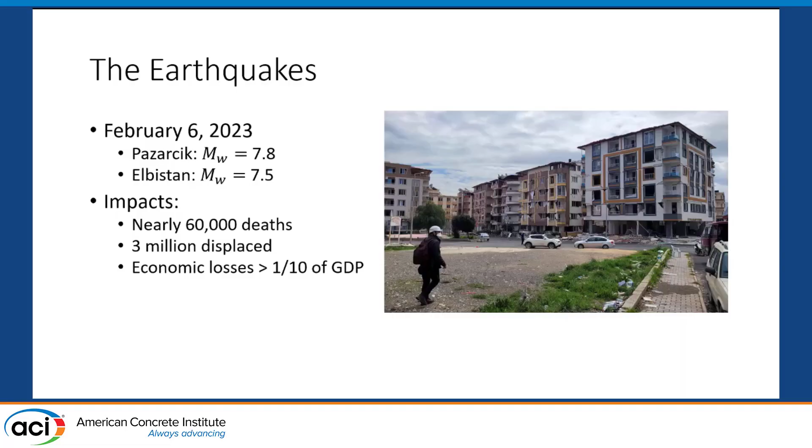The impacts were substantial. Considering both Turkey and Syria, there are estimated deaths on the order of 60,000, 3 million people displaced, and many of them are still displaced. On the Turkish side, economic losses exceeded 1/10 of GDP. So substantial impacts from this shaking. I've listed my sources there.

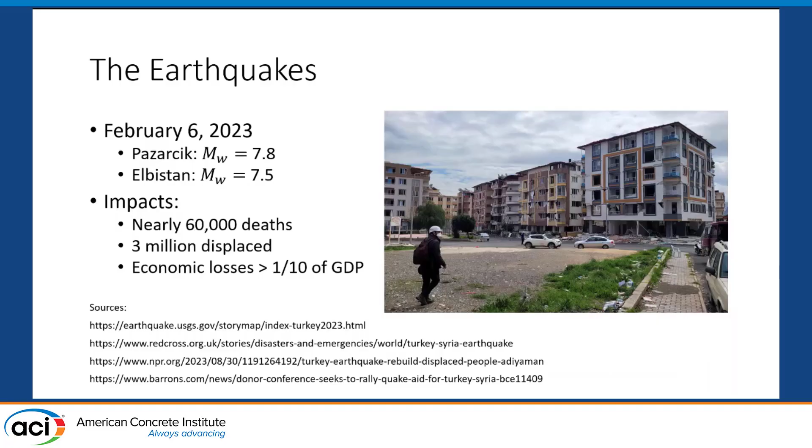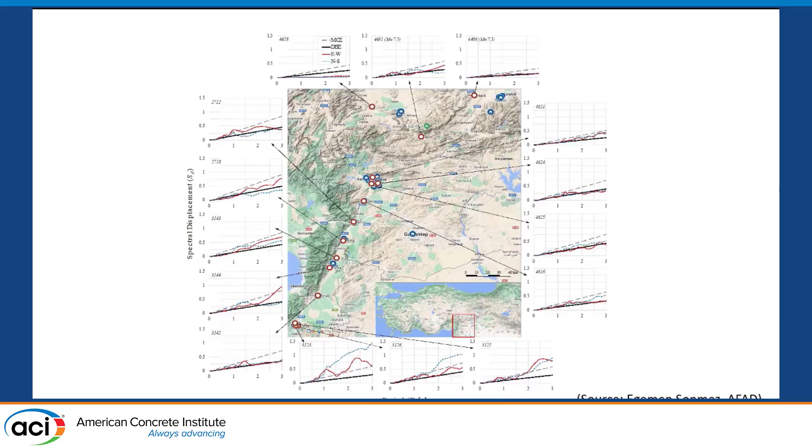ACI Committee 133, with financial and logistical support from ACI, put together a team. I want to acknowledge Santiago Pujol and Cemalettin Donmez for doing a lot of the organizing on our side too. We put together a group of dozens of engineers, practitioners, academics, and students from all over the world. A large contingent was local from Turkey. We had engineers from ASCE join us, from NIST, from Wiss, Janney, Elstner—quite a large contingent of folks mobilized.

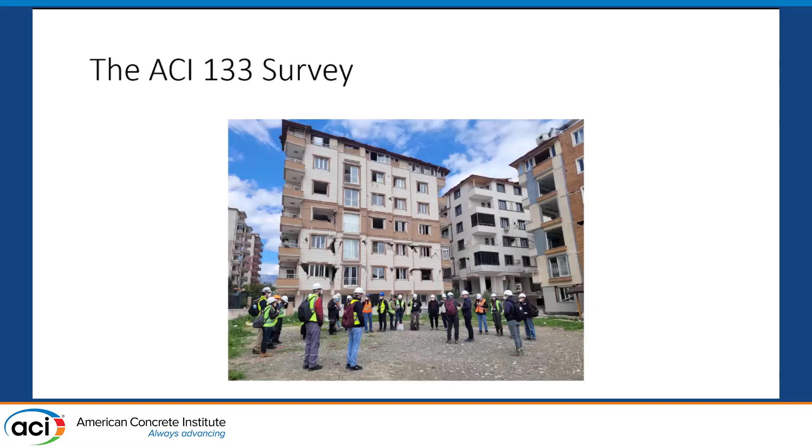We actually had two different groups. This is one of the groups preparing for a survey in Antakya.

Over the course of 2 weeks, in late March and early April, about 2 months after the earthquakes occurred, we spent time visiting 10 cities on the Turkish side and surveyed roughly 300 buildings. We have complete records for about 240 structures. The way this would work is we would get into buses, go to the city of our choice for the day, and spend the day, sometimes 2 days, in that particular city looking at structures.

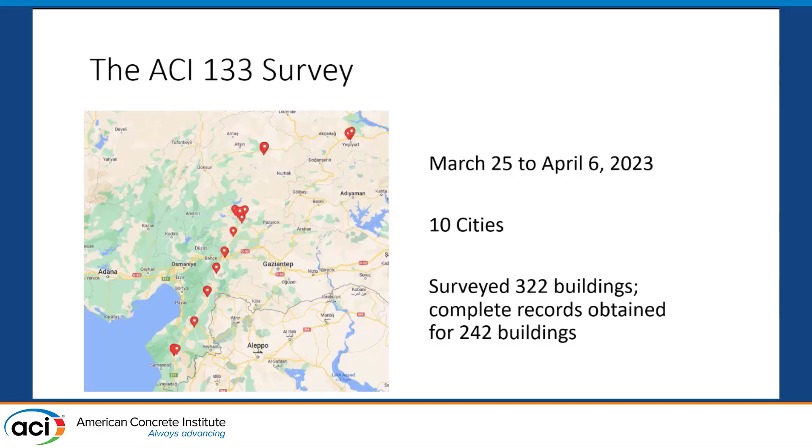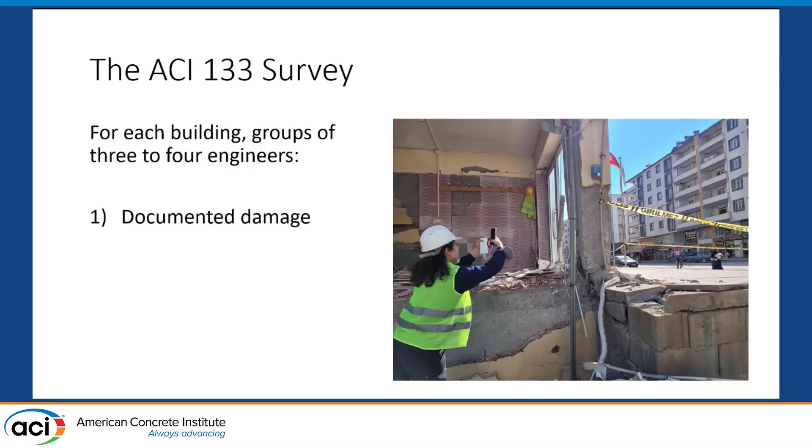For each of these buildings, we had a group of say 3, sometimes 4 engineers that would enter the structure and primarily focus on what we judged to be the most critical level. Often that's ground level, but in the case of podium structures, maybe we selected a different level. We spent most of our time documenting damage in all of the vertical elements, beams, etc., anything we could observe, and also took time to measure span lengths and column and wall dimensions throughout that critical level. I think some of my colleagues will present more using the data we collected here, but we have pretty detailed data for 240 or so buildings.

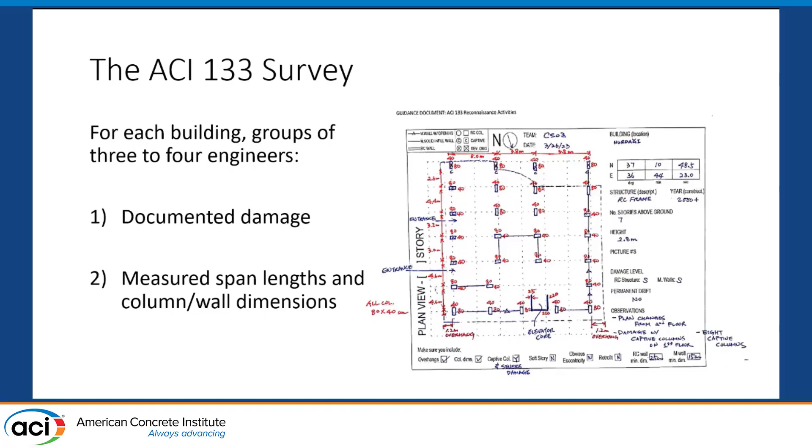The narrative that's come out from these earthquakes, the media has presented, has really focused on problematic detailing. And it's true, that's part of the story - the shaking and drift demands revealed problematic details. That's the focus of my talk, but I think there's more to the story, so I hope you'll stick around for the other two talks this morning.

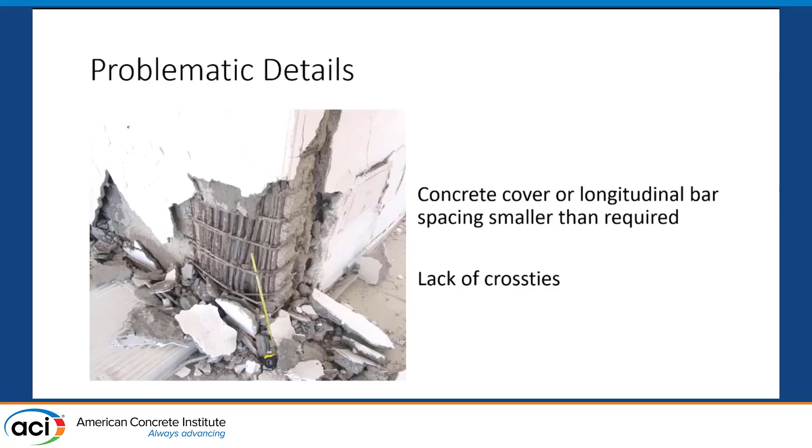Also, pretty pervasive lack of cross ties where I would have liked to see them. And I should note, these details are not compliant with the Turkish code requirements either - it's not necessarily a deficient code.

We saw a lack of 135-degree hooks in all kinds of elements, as in a column that did not perform well.

We saw widely spaced transverse reinforcement around small diameter longitudinal bars, which I think is an interesting note. The spacing here may be okay if the bars were number 8 or number 9, but these were roughly number 6 bars. I think they prefer to use these smaller bars to make it easier to bend and place in the field, but that, of course, makes buckling more critical.

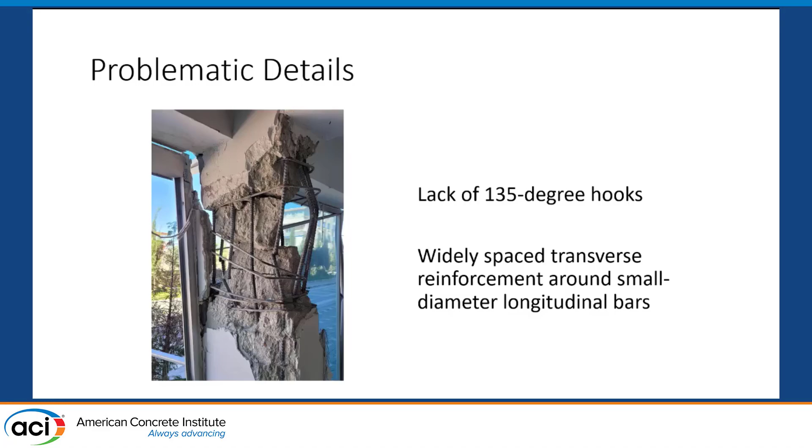We saw several examples, very common, of buckled bars right around the perimeter of the building at the top of the foundation. In this case, there was a column that appeared to have good confinement throughout the clear span and in the foundation, but at the joint between the foundation and the column, the space between the bottommost column hoop and the topmost foundation hoop was too wide - and of course, the bars buckled there.

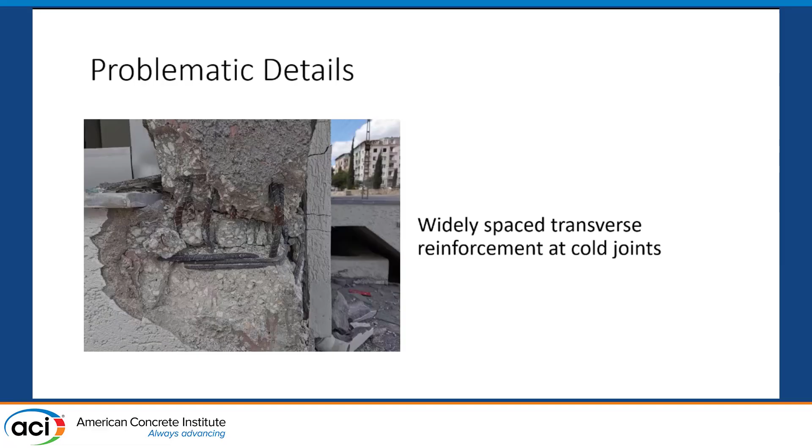You saw a lot of these. This is a zoomed-in photo of a column - I'm tracing what would have been the base outline of the column section where it met the foundation. You can see this bar coming out of the foundation that was bent into a dog leg to fit into where the hoops and column cage were, so it wasn't quite lined up properly. These dogleg details effectively function as a pre-buckled bar - as soon as you start to displace, they want to straighten and then bend. We saw several examples where this detail led to bar fractures.

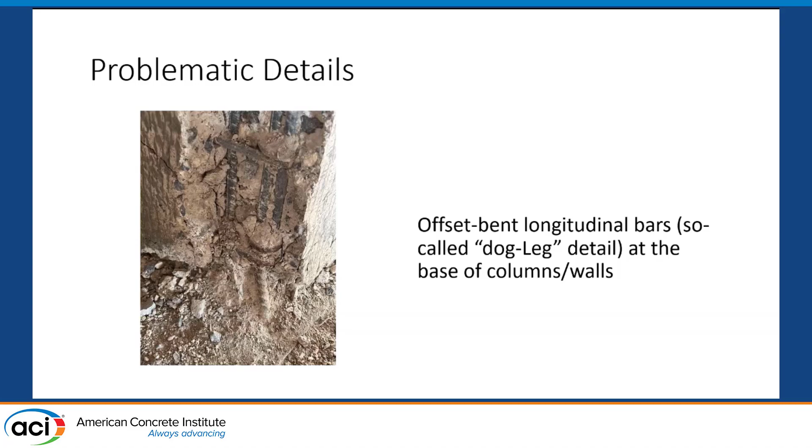We do have offset bent longitudinal bars in our code, but there's a requirement on angle. In many cases, these were much steeper than the permitted angle.

There were a lot of lap-spliced bars where it's convenient - at the base of columns and at the base of walls - and that caused all kinds of concentration of damage. This is a photo of a column with a lap splice within the span right above the foundation. That leads to a stiffer section right above the foundation; rotations concentrate at the joint with the foundation, and in this case, buckled the bars. So the splices survived, but caused a localization of damage. This is actually quite a scary building - the columns had effectively slid off the foundation in some locations.

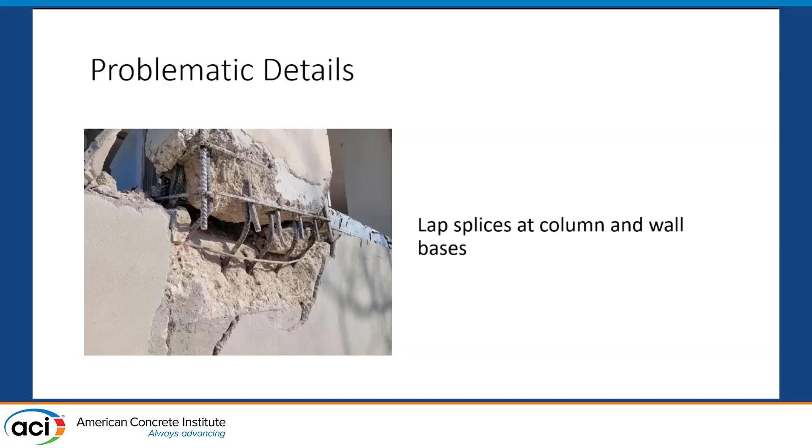We saw this in walls too. This was a 3-meter long wall with lap splices that began about 70 centimeters above the base. Because you then have a stiff section starting 70 centimeters above the base, even if the splices do well, you get pretty localized damage at the base of the wall - so you don't get the distribution of damage you might hope for.

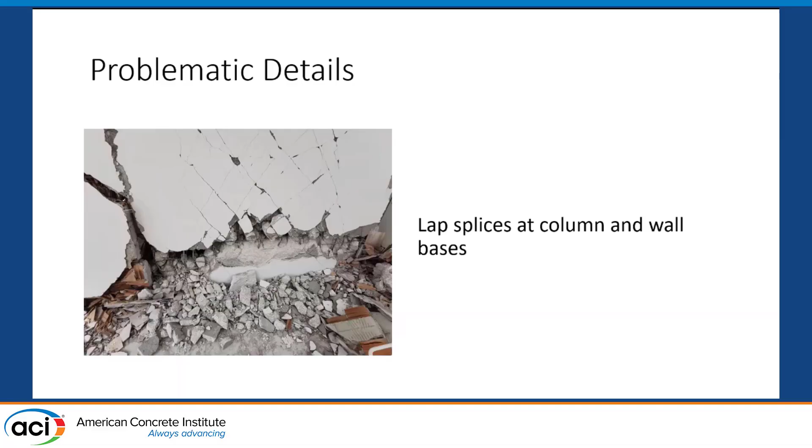Another example of a wall with lap splices, this time at the base of the wall, which was permitted until 318-19 - I'll note that. This is a detail we would see all over. In this case, the stiffer section at the base caused damage to localize right at the top of the lap splice - you don't even have to see the lap splice to know where it terminated. Those concentrated rotations led to eventual spalling and failure of the lap splices. I don't think I have a photo of it, but the lap splice here effectively has no concrete left in that boundary element, so this wall was badly damaged.

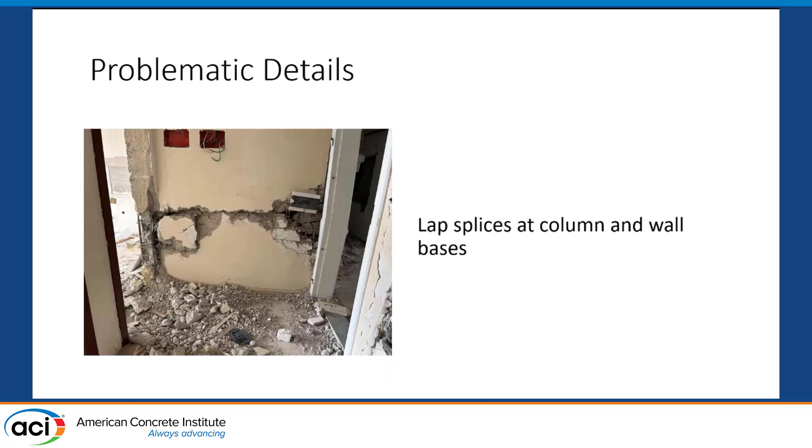I think it's fair to say it's a good thing we don't allow lap splices in these areas anymore.

This is an issue we saw frequently in beams with longitudinal bars on the bottom face that were terminated, say, 3 member depths away from the face of the column. We had 2 continuous bars and 3 terminated bars, and instead of getting rotations at the face of the column where the engineer was hoping to see them, we saw concentrated rotations right at the bar termination location. That was made worse by the lack of closely spaced hoops, so the continuous bars buckled and fractured.

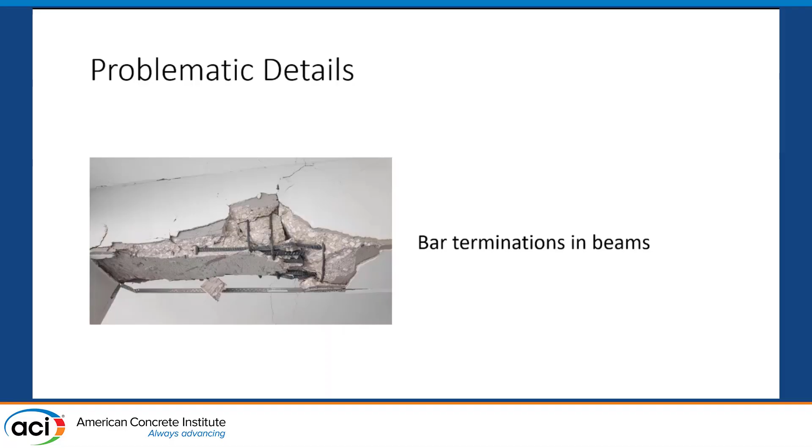So I thought it's warranted to discuss where to cut bars off in beams that are going to be experiencing large rotations.

This is a photo of a short, deep beam that behaved like a coupling beam, but judging by the reinforcement provided, it was not intended to operate as one. There's no inclined diagonal bars. We have pretty light longitudinal reinforcement and hoops, or probably stirrups, at less than d over 2.

But the damage was extensive. This is badly damaged, and even if it wasn't essential for the lateral performance of the building, it's a fall hazard. It can be a danger to the folks living in the building, and it leads people to not trust the building. We heard about demolition decisions being made based on damage like this. So if we want people to feel comfortable remaining in place, we need to think about limiting damage like this, even in 'non-participating' parts of our system. I use that in quotes - everything participates, whether we mean it to or not.

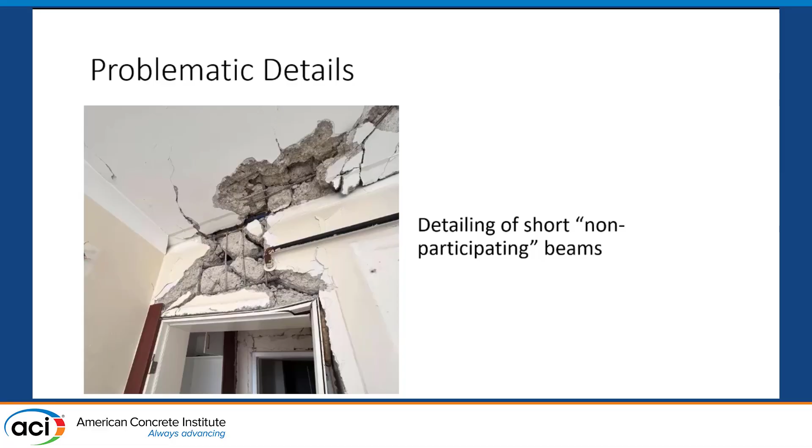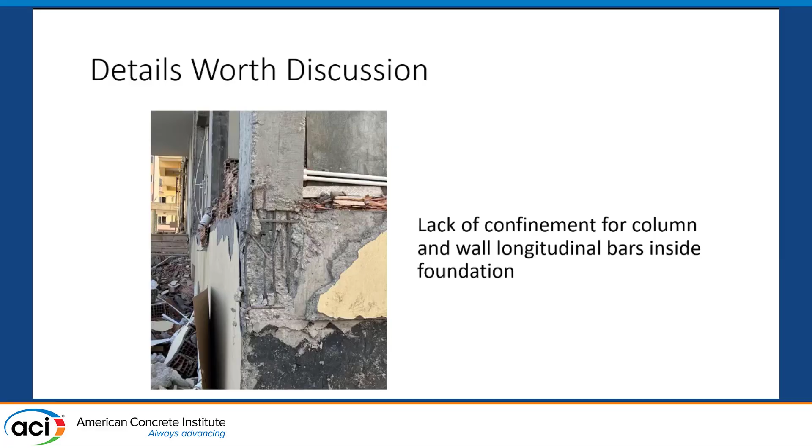We saw this detail, this problem, several times. You can see here through a roughly meter deep foundation element, there are no hoops. And it's a life safety problem.

This is a photo of a column with a similar issue. The bars in the foundation were not confined. They buckled, and so this relatively slender column slid off the foundation. I don't know if you can see it with the way the photo is cropped, but the beam above this column is sagging appreciably. So we did not feel safe entering this building - I took the photo and kept walking. But that is a life safety hazard.

I was interested to note that ACI prohibits this detail, or more accurately, requires confinement in the foundation near edges if you're building in seismic design categories D, E, and F. But we don't require it, as far as I can tell, in intermediate moment frames. So that would be something I'd suggest we consider looking at.

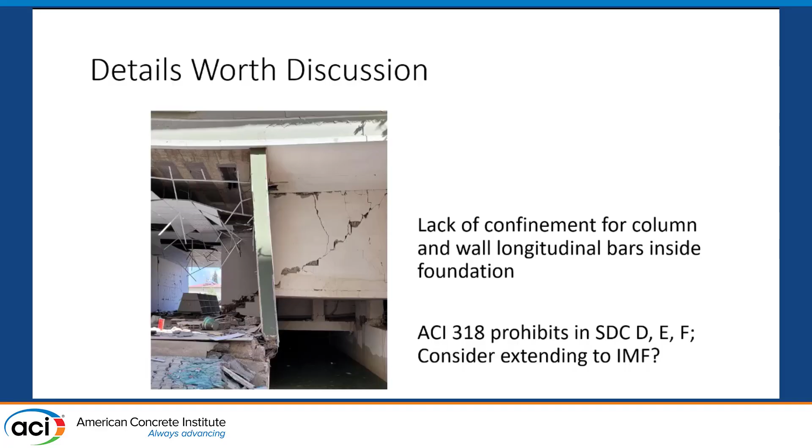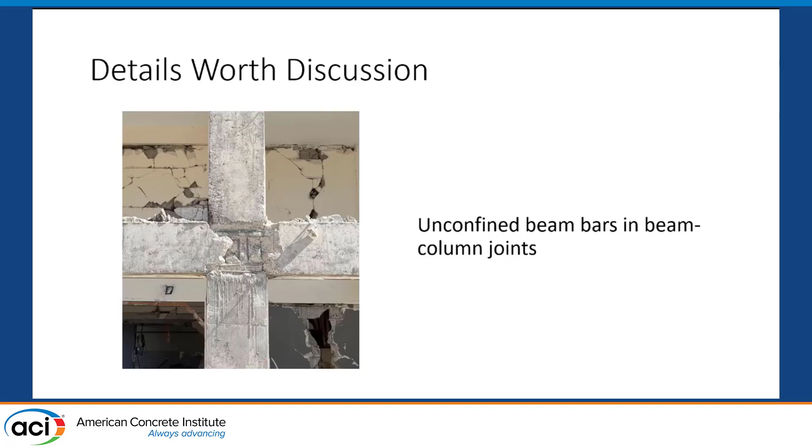Another detail I thought was interesting: we saw several examples of unconfined beam bars passing through beam column joints. You have the column cage, column core - this joint also suffered from a lack of transverse reinforcement in the joint. The top and bottom beam reinforcement on the outside edge of the beam passed outside of the core and was therefore unconfined throughout the whole length of the joint. We saw this in interior joints, and in an exterior joint.

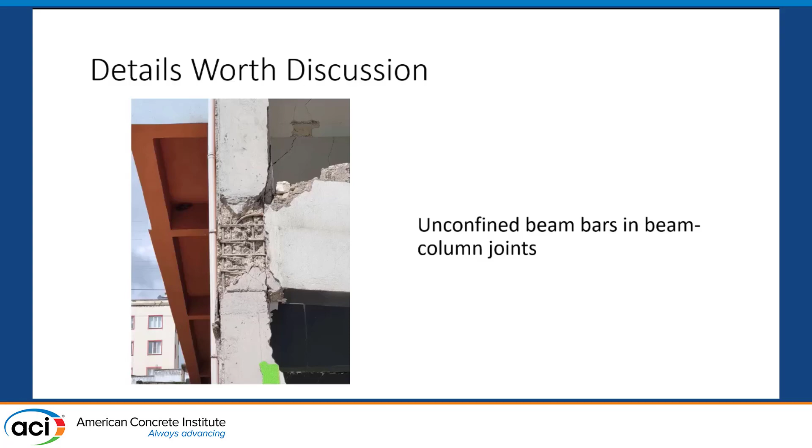This is actually a relatively well confined joint. I would like to see 135-degree bends, but there was transverse reinforcement. I don't know if you can see it - there were 5 column longitudinal bars, and the hook passes outside the first 3 and then gets tucked inside, thankfully. The tail is inside the core.

This is a beam framing into a relatively long or large column, and the bars weren't even hooked. The outermost layer, or outermost bars, were just developed straight into the column. And of course they broke out - as soon as damage started to occur in the joint, they broke out.

We spoke with the contractor who was building this building when the earthquake occurred. He said the inspectors actually prefer this detail, because to get the bars inside the column core you'd have to move them further away from the outside face of the beam, resulting in excessive cover. So inspectors preferred to have them on the outside to limit the cover. This is a problem - excessive cover is not.

I think it's interesting that we require confining those bars that pass outside the joint for special moment frames, but I would - and I will tomorrow actually - suggest that 318J consider requiring this for what I'll call non-participating frames: intermediate moment frames and ordinary moment frames. Those bars have a lot of demands on them, and I think they ought to be confined.

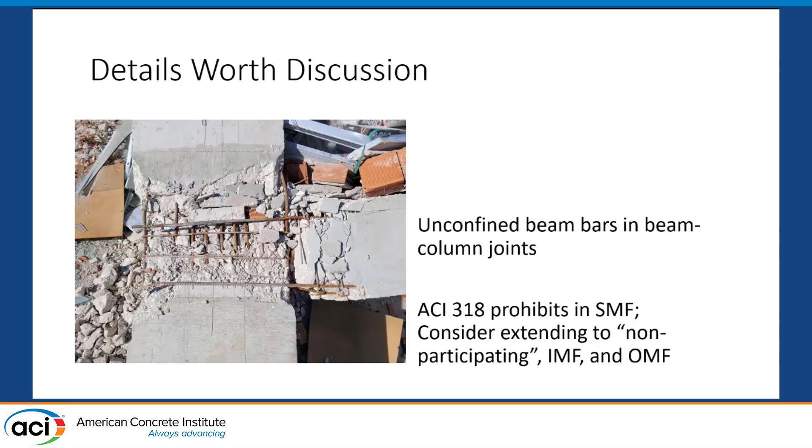I have just a couple more slides, and then I'll get to our recommendations. But I do want to highlight the role of non-structural damage in the impacts that we observed.

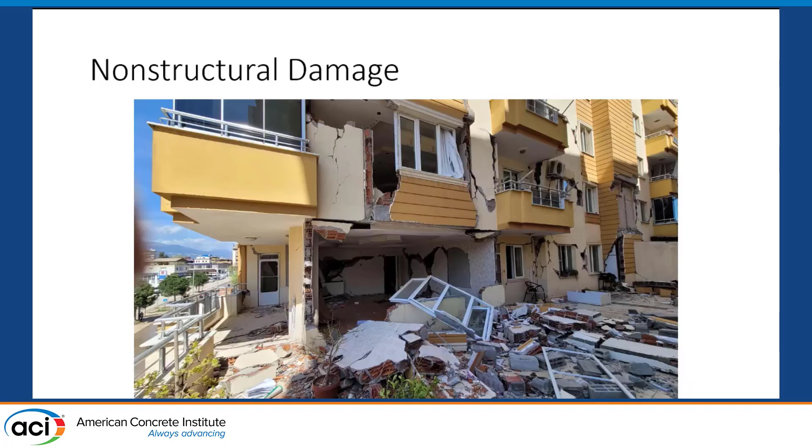Even if it could be repaired easily, and I'm not sure this case could, when you have widespread damage like this, you don't have materials to make these repairs. So if we want to limit displacement of folks, we need to limit non-structural damage. We're not the first to observe that.

Lastly, I want to highlight damage to reinforced concrete stairs. We saw this frequently in buildings. They used reinforced concrete stairs that were fixed to the slab at the lower level and the upper level, and apparently not detailed to accommodate that interstory drift. So you have the landing with some flexural demands, and the concrete breaks out quite quickly.

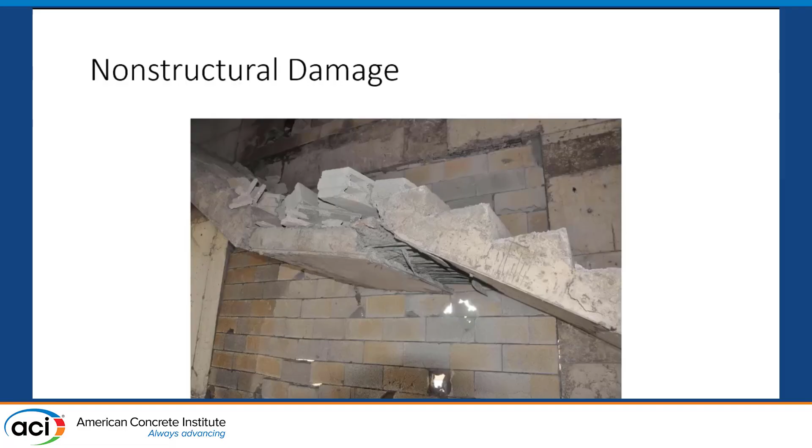And this is dangerous, right? This is an egress path for folks, and so we ought to have better details for our stairs.

So with that, I'll summarize briefly, and then thank you. The first observation is that the large drifts that were there revealed problematic details, many of which were not code compliant. I do think that what we saw suggests ACI 318 might consider a couple changes.

First, requiring confinement of column and wall boundary element bars in the foundation near edges, for intermediate moment frames. And then requiring confinement of beam longitudinal bars passing outside the column core in cases other than special moment frames. And then, of course, detailing non-structural elements is important.

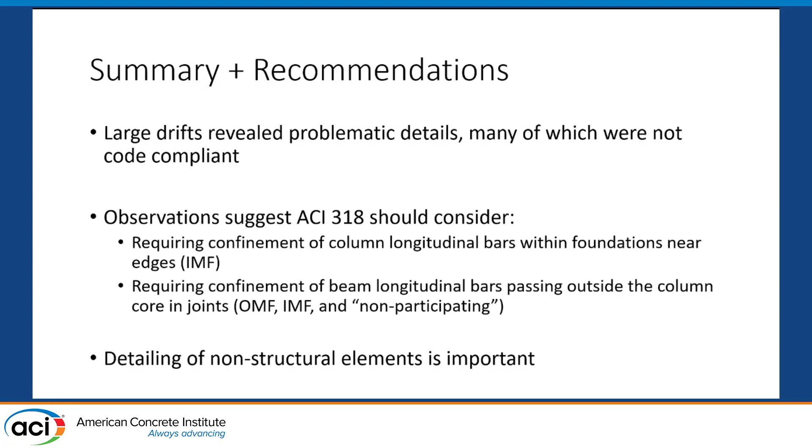Look at the impact of the infill. Can you read, just so everybody in the back can hear you? So I think these are frames that have infill walls in them, right? So what was the impact of the infill walls on the behavior that you saw?

Okay, I guess they can go a couple different directions. First, the infill walls were not detailed to be connected to the frames, and so it appears that they broke out and became unstable relatively quickly. They do, of course, especially if there are no openings, if they're confined by a frame, add some stiffness to the system. I think in the talk that Santiago will give, he'll consider the effects of walls and, to some extent, masonry walls. I think there are examples where that has been beneficial, but I don't know that we saw clear examples of that in Turkey.

Remy, thank you for the good presentation. I appreciate the details. Since I'm originally from that region, part of the country, not Turkey, but on the other side of the border in Iraq, these kind of deficiencies that you talked about, I can see that, these are very prevalent in our construction as well.